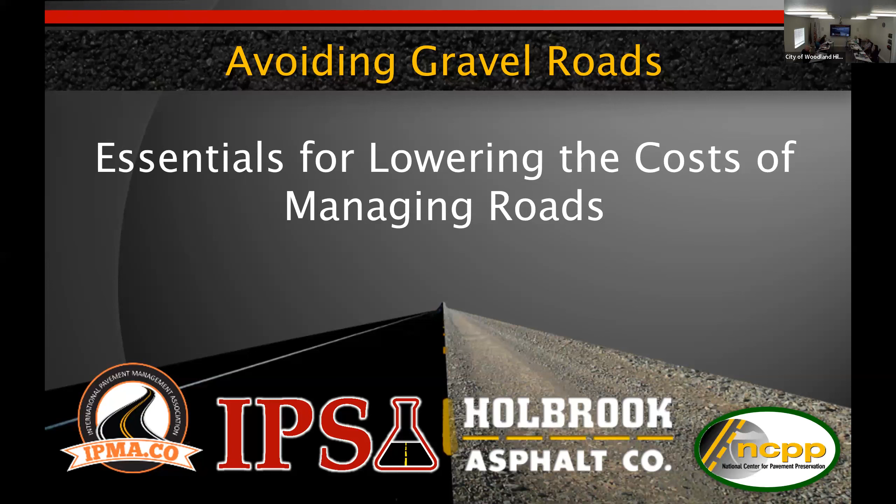Holbrook Asphalt is the company I work for. IPS is a sister company that provides material. Holbrook's kind of a contractor/consultant.

Mark Beatty, who sits on the board, is the reason why a lot of the information is from those few agencies - he's been on the board of the National Center for Pavement Preservation, as well as director of IPMA Academy on their board. So he was dialed in.

When he was on the board on the Rocky Mountain West of the National Center for Pavement Preservation, the director, Larry Galehouse, committed each region to put something together on pavement preservation. He said, look, we have this great, big, huge database, we've got all this great information, but it's going nowhere. We need to start dialogue, we need to start something. Now, we're not going to solve everybody's problem, but at least we can have a conversation that starts the dialogue to help people understand how to manage their roads better.

So Mark was on the board of the Rocky Mountain West when we put this together, and this is our version of it to kind of help introduce us to you guys and give you some good, valuable information.

We always start off with something that has nothing to do with roads, other than cars drive on them. So, do any of you fancy yourselves car gurus?

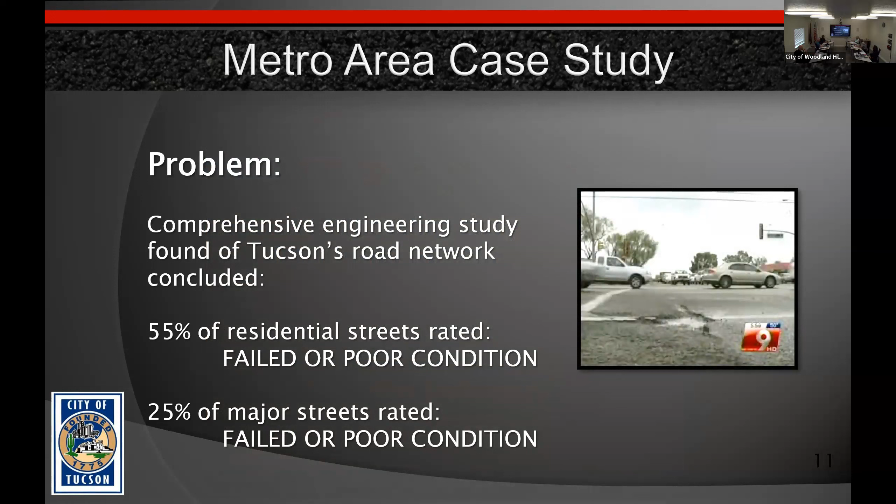So what they ended up doing was get some reports. They had an engineering firm come in and explain that 55% of their residential roads were in failed or poor condition, and 25% of their major streets. And what did that mean in dollars? It meant they had an $875 million problem: 550 million to repair the poor residential roads, 148 million to repair the arterials, and 175 million just to keep the good roads in good condition.

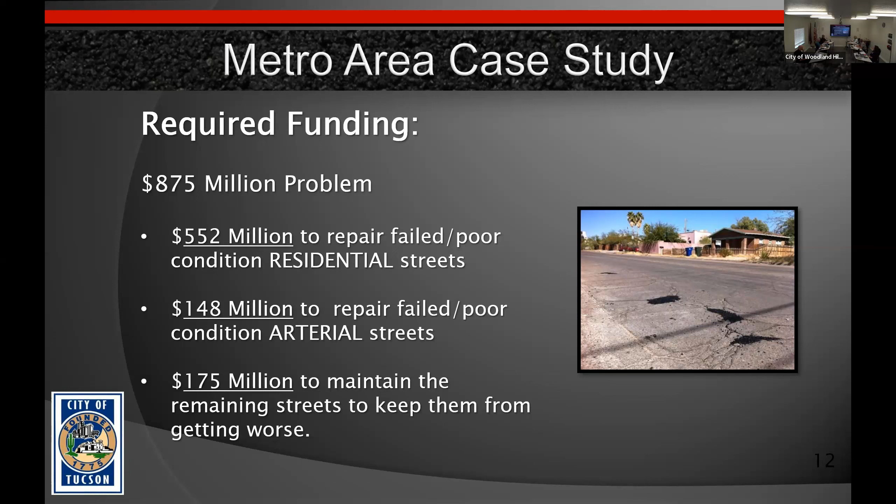So, you're making us feel a lot better. Well, everything's relative — I'm pretty sure your budget is similar, just the numbers are changed. It's relative because your budget is what it is, their budget is what it is, but they didn't have this in their budget. So what did they do?

They went and got a $100 million bond. The city council decided they'd throw in $20 million, but that still left them needing $755 million to get their roads back up. Now they're on their second $100 million bond, and they're making progress, I would say, but they're not doing things right.

Things got political, so they want to show they're doing a bunch of stuff, and it's a paintbrush approach. When you take a bond out, you guys well know this — if it's not a valuable tool and it's not serving you for the long term, say two years down the road your roads are back in the same position. They look good for 2 years, but they didn't really benefit you long term by making them last longer or provide better ride quality. So you've spent that money and it's gone. Now you've got to pay the bond back plus interest, and your roads are in no better shape.

I'd say right now they're spending about 75% of their budget on good value, 25% I think could be better. But it's because it's very political, and people making the decisions don't understand how roads deteriorate. So that's where they want it to look good — they want it to be the news.

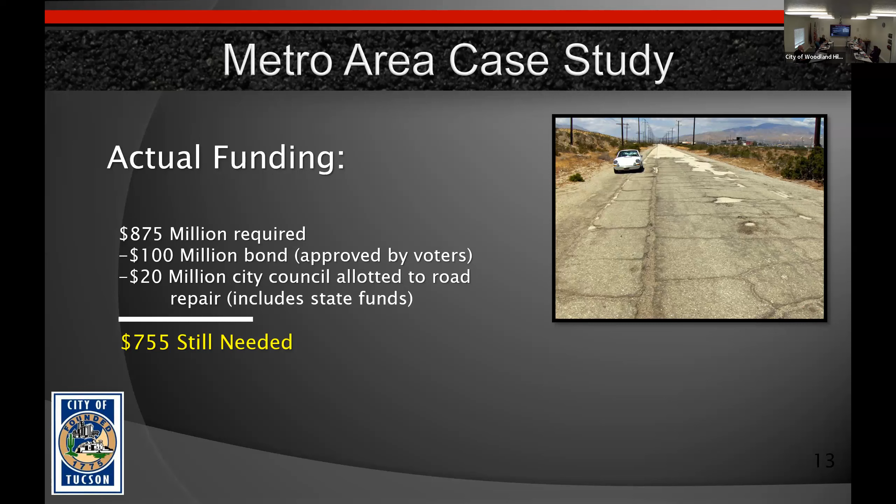They want it to be on the news. They don't. You need to really focus in and make a difference.

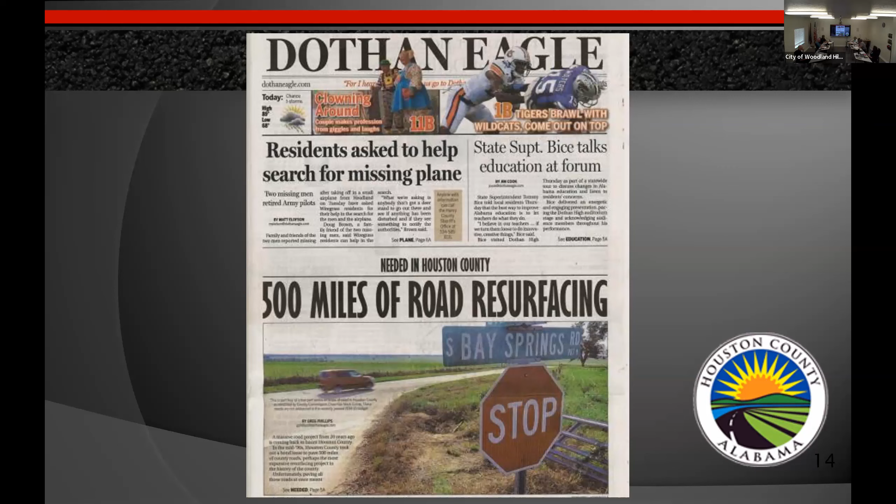Mark and Dr. Heitzman from the NCAT track out of Alabama were out doing some APWA classes, similar to this. A public works director for Houston County, Alabama came in. He said, okay guys, I need you to tell me what to do. I've got 500 miles worth of roads. It's a massive road project from 20 years ago coming back to haunt Houston County.

In the 90s, we did 500 miles of road. Unfortunately, doing all those roads at the same time meant they would all deteriorate at the same time, and that moment is upon us. Houston County doesn't have $30 million at its disposal, but the problem isn't going away.

So what do you think Mark and Dr. Heitzman told their public works director? He said, you guys have the answers, tell us what to do with our roads. Unfortunately, you can't put the genie back in the bottle. Once the roads deteriorate, it's very expensive and costly to repair them.

But what we did teach him is we sat him down and said, look, we can teach you some strategies and philosophies so you don't find yourself in this situation again. I think Houston County is still in the process of taking care of those 500 miles of roads, but they've made a huge dent in it because of a mindset shift from a worst-first to a best-first process.

That helps a ton. You said best-first. A best-first approach is the best way to spend your money. I'll explain that to you in a little bit here, along with some of the data behind that.

So the basics of pavement preservation: your asphalt, when it goes down, is nice and pretty and black. Asphalt is really basic, there's not a lot to it. It's two components - you've got the aggregate or rock, and then the asphalt binder or glue that holds the rock in place.

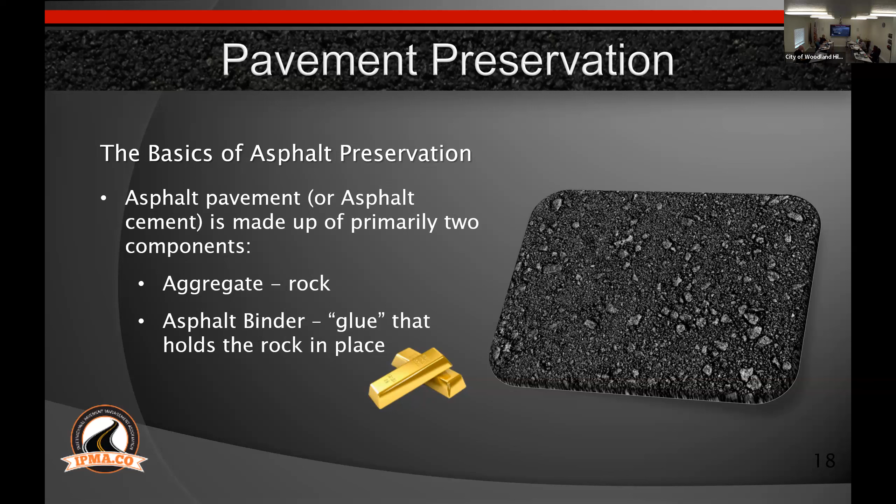Now, the rock has been here for millions of years, and it'll be here millions of years after it's gone. The important part, the reason the gold bars are there, is because that's the key part of the pavement - the binder that holds the rock in place. We need to take care of that. That's what makes the roads last longer. If you don't take care of it, it falls apart and loses its flexibility and adhesion qualities, so you'll see it gray out fairly quickly.

You'll see it gray out, have some raveling, then you get cracks in it, and eventually moisture gets down in the base and you have failures. Our goal is to preserve this so you push these stages in the pavement's life further and further down the road. You want to take a 20-year pavement and make it a 40-year pavement. That's why you lower your ownership cost.

But the key is to stop oxidation - that's the primary concern, oxidative aging to your pavement. That's the basics of what's destroying your pavement. Now, oxidation is going to happen at the time of construction, it's going to start, but there are a couple of accelerators to oxidative aging.

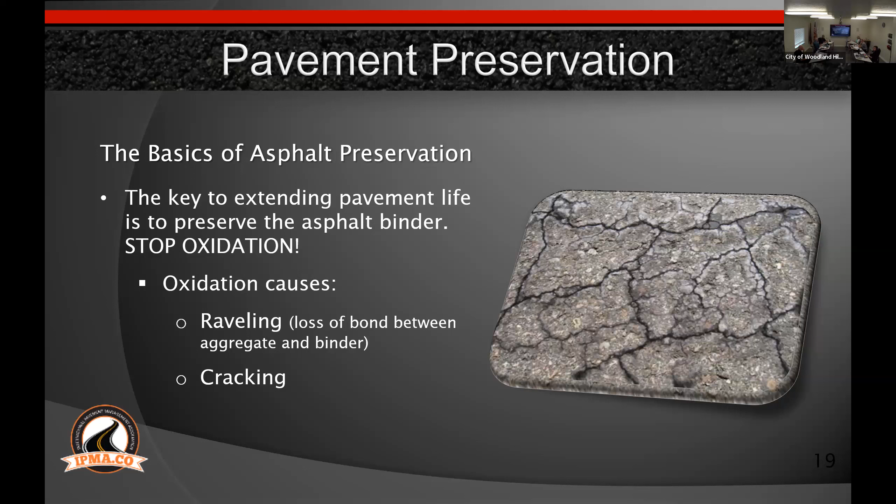You have to take a guess at what those are - I'm looking for two things. Heat, sun, weather in general, moisture. Yeah, so the two things we're looking for as the primary accelerators of oxidative aging are UV rays and moisture. You guys get the double whammy here - you've got high elevation, so intense UV rays and heat in the summer, and then in the wintertime you get moisture that sits on the road and gets pushed down into that pavement.

Now, those aren't causing the oxidation, but they're accelerating the process of the oxidative aging of your pavement.

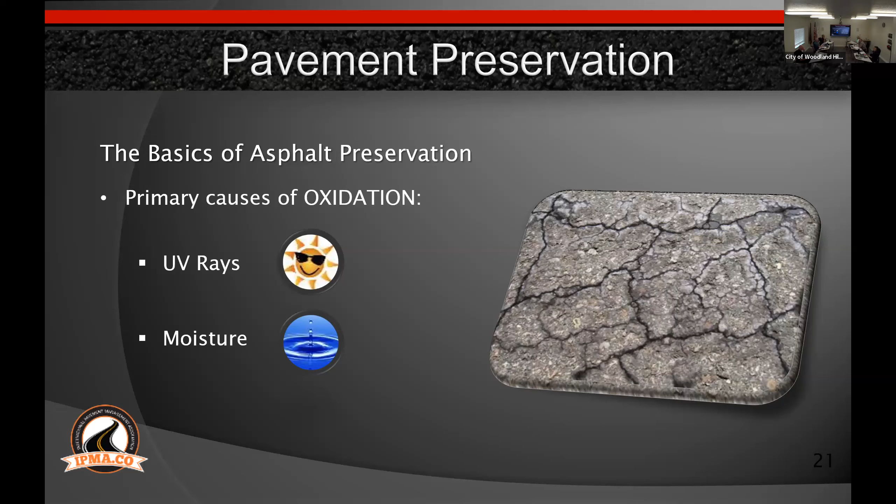So if we can slow the effect of those two things on your pavement, on a residential roadway, on a road that doesn't need a wearing course - and I don't think you really have any roads in your city that would need a wearing course. Now, you do have some steepness issues and other issues that would require you to maintain some friction. But if we can limit the effect of those two things, you can really stretch out the life of your pavement. So here's some material put together by AASHTO, called Rough Roads Ahead.

Basically, this was a report put together on a national level that said, look, if we don't change our process and what we do, we've got some rough roads ahead. It's available in PDF format on their website, but we pulled one page out of it. If you like pavement preservation, it's a really good read. If not, it'll probably put you to sleep.

But what it's really good for is for the people that hold the purse strings and are deciding where the funding goes. This is an excellent report because it helps you understand where your money is best spent. And we pulled this one page out because we liked it.

We live by this rule. It's called the life cycle of the road. You start with the design phase, then a construction phase, initial deterioration, visible deterioration, and then you get down to disintegration and failure.

And we always ask this question: when do you think most municipalities get involved in preservation? What stage - four, in visible deterioration? It's five, because our residents come to us at four, and by the time we can pay for it, maybe it's five. We were doing this class for the city of Orlando, Florida, and I guess the best answer I ever had from their public works director was 4.9 - right before it falls apart, they want the magic bullet to come in and make it brand new again. And unfortunately, when you get to that point, it's hard.

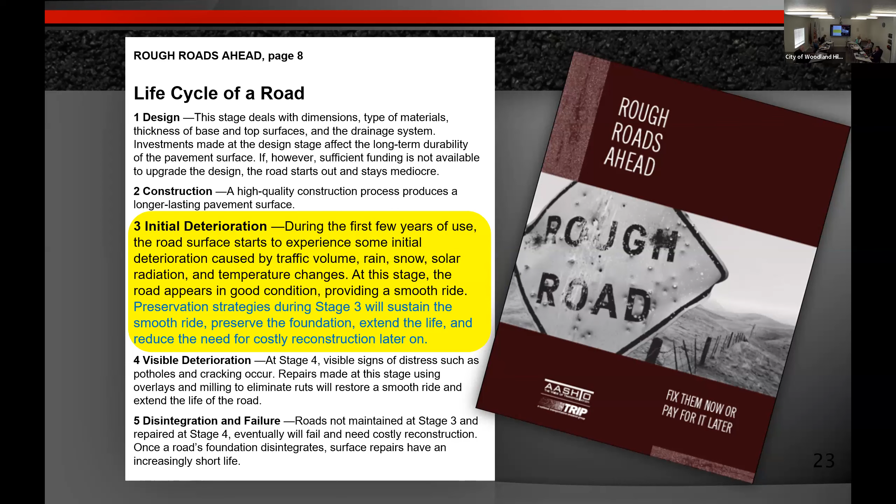So as long as we're keeping the snow off the road, we're actually helping the road. Because when the snow sits on the road, it doesn't just sit there - it builds up and gets pushed down into the whole cross section of the pavement, which accelerates the oxidative aging down through the pavement. So you want to avoid that as best you can.

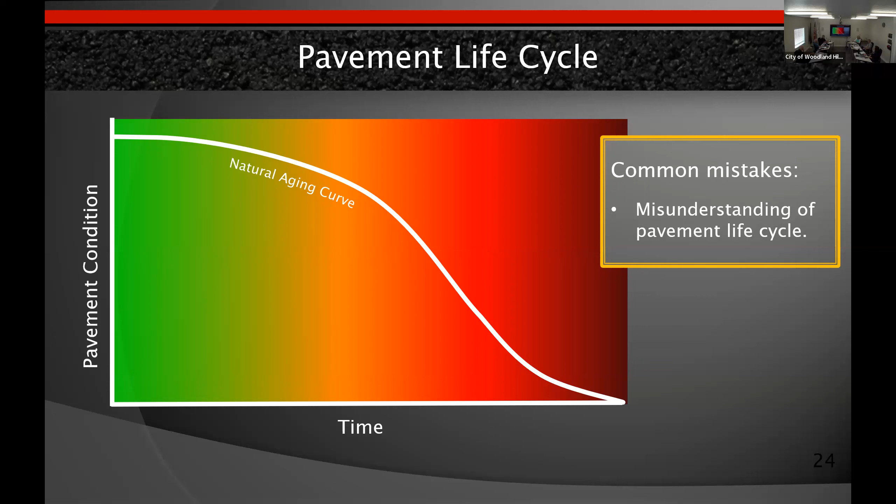The National Center says it's serviceable rideability is done at about 22 years if you don't do anything to it. But what a lot of people don't see is there was a guy named Dr. Kandahl, and he was like, okay, I see this at the surface. I see the aging. I see how things are falling apart when they're falling apart, but he wanted to know why. What's the primary cause? What can I use to most accurately describe how the pavement's aging, or the health of the pavement?

And can I stand up? Can I walk up there? Because my pointer's not working. Do you mind carrying your microphone? I'm sorry, I don't know if we have anybody online that works.

So when we look at this, the pavement starts to age, it looks nice, and then it gets to this point, and then it drops off really quick. This is actually called the waterfall. It starts to get deteriorated at a rate where it's really hard to catch and do anything.

What Dr. Kandahl discovered is he looked at this. So this is a surface, it's like a visual, the white line. The black line is kind of like an MRI view, it's what's going on under the surface. And what it measures is the flexibility of the pavement.

And what you'll see here is there's a substantial drop right out of the gate, and the damage is done. It doesn't manifest itself until here at the surface, but the damage is done here. So what we really need to concentrate on is taking and flattening this black line out, because that in turn will flatten and extend the life of your road itself, the white line.

So I'll refer back to this later on in the presentation, but that's really the key to extending your road's life expectancy and quality of use, is to affect that Kandahl curve and stretch it out for as long as you can.

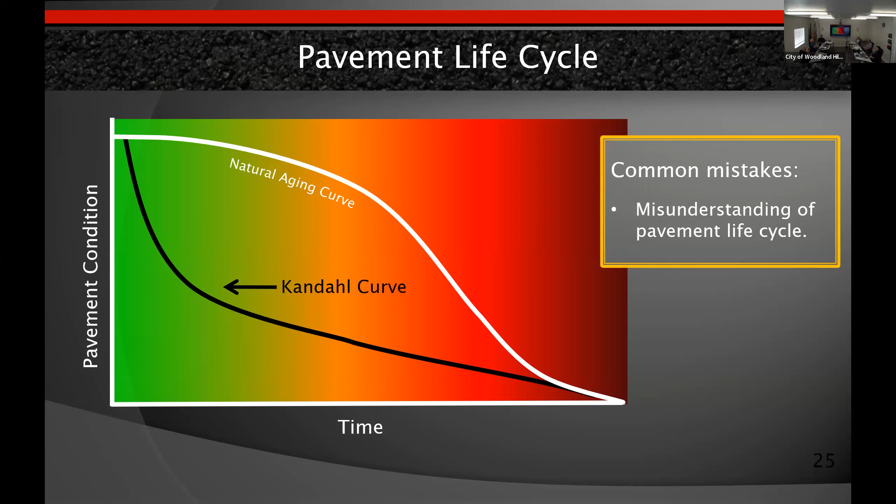Well, that's good. That means we don't have to do anything. Yeah, we're good. Somebody kick a can.

I mean, sometimes you have to do something for safety reasons. You can never neglect your maintenance altogether, but sometimes it's just, you got to bite the bullet and decide, wait, we don't want to spend any more money on this road until we're ready to reconstruct it.

A really good example of all of this is Thousand Oaks. In reality, we have done nothing to Thousand Oaks since it was laid down in 2002. The asphalt is 20 years old. The only thing that was done was a chip seal that failed. Now you look around in Thousand Oaks and you see where it looks really odd. The surface isn't uniform from side to side, and you can see where the chip seal peeled off because it didn't stick.

Now there was an issue with it, I don't remember what happened, but you look at the rest of the roads in Thousand Oaks and see how they're alligatoring. The cracks go all the way across the road in a lot of spots, even in places where we haven't had truck traffic.

Now you go from the basin up to out the back of Deep Forest. You had 500 truckloads of dirt go over that section. But all the other roads in Thousand Oaks didn't see that damage, and they're just as bad. So you can't blame the damage on that short section on the 500 truckloads. The damage we're talking about here is from neglect.

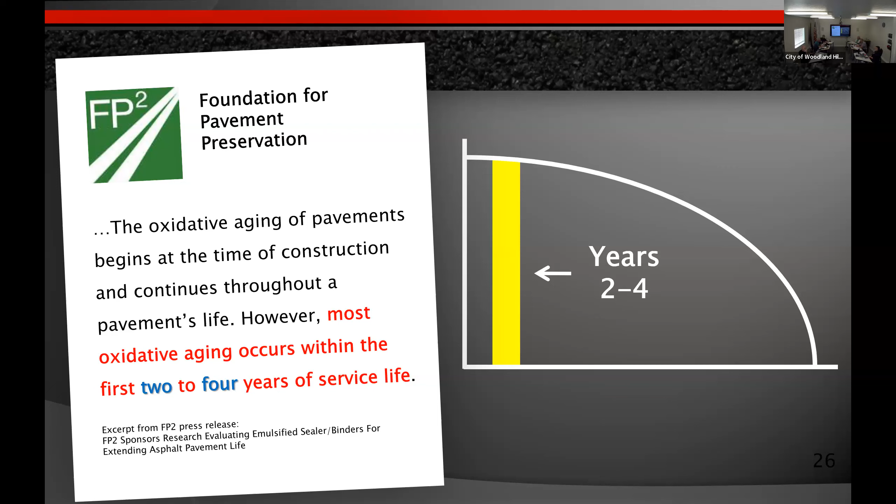Now, the road that's still in good shape - if it falls out of maintenance into rehab, your dollars go up exponentially. And if it falls out of rehab into reconstruction, like your 30-year-old road, the dollars go up exponentially again. So the return on your investment is a lot better in the maintenance mode on your roads than it is in rehabilitation or reconstruction.

So what we ended up doing with Spanish Fork is we got on their local channel and tried to help the residents understand what we were doing. And Jamie says, okay, I'm in - this was back in 2009 - but if this doesn't work, you guys have got to give me a job. So he flipped his approach.

From the way I understand it, the majority of his dollars were spent on the back end, with a little bit to spend on the front end with some crack sealing and potholes over the winter. But when we went in there, we flipped that - we put the majority of his money on the front end, taking care of his good roads for about 5 to 6 years. He still kept some money in the budget for the back end, because you can't neglect it for safety reasons, you've got to have some of that there. So that allowed him, after 5 to 6 years, to get all of his roads into good shape.

They're taken care of and they're being preserved. Now we can shift some of that money back to the back end and start rebuilding some of those roads. But when you rebuild those roads, they immediately go to the front of the line for preservation because that's the most valuable tool you can do, on a brand new road. So what he was able to do was his overall road network was in decline because they were worst-first, and he had the big housing boom through the 2000s.

So what we did over these 5 years is we kind of flattened it out. And then he started rebuilding some of the really bad roads and putting them into the maintenance program. And now his overall network is starting to increase. He's done an excellent job of that.

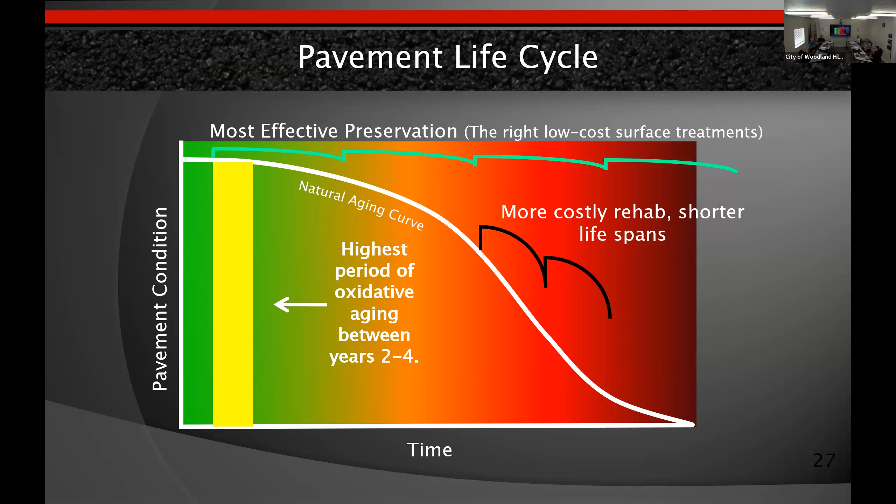I actually got him on camera a couple months ago, I'll send you guys the video of Jamie. I speak of Jamie because he's right here, your next door neighbor, and they've done an excellent job in Spanish Fork of preserving their roads. They had to make a change in thought process to start managing their roads more like the National Center recommended, like the IPMA Academy recommended. And the data just shows that's the best way to manage your roads.

Here's some information. When you get involved early, you're up at the top. It doesn't show on the screen, but when you're in the green, you get involved early when the pavement's still healthy, and the preservation is a lot cheaper to do. When you get down to intermediate or late rehabilitation, the dollars you spend on those treatments is substantially more, and they're short-lived because you have an underlying problem you're not getting rid of. You're just covering it up.

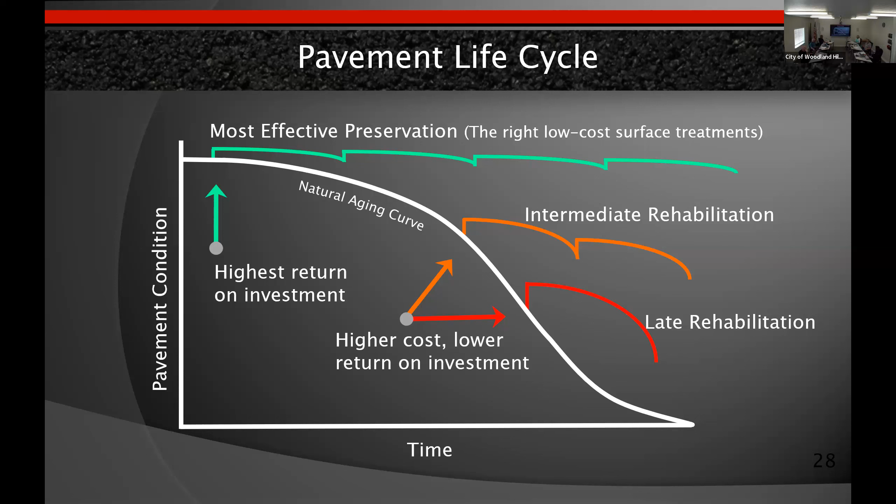So again, the higher return on investment, from AASHTO: every dollar spent keeping a good road good precludes spending 6 to 14 dollars to rebuild one that has deteriorated. I'd much rather spend $1 on a road than $6 or $14 on a road. Out of everything we say, those are key points to remember.

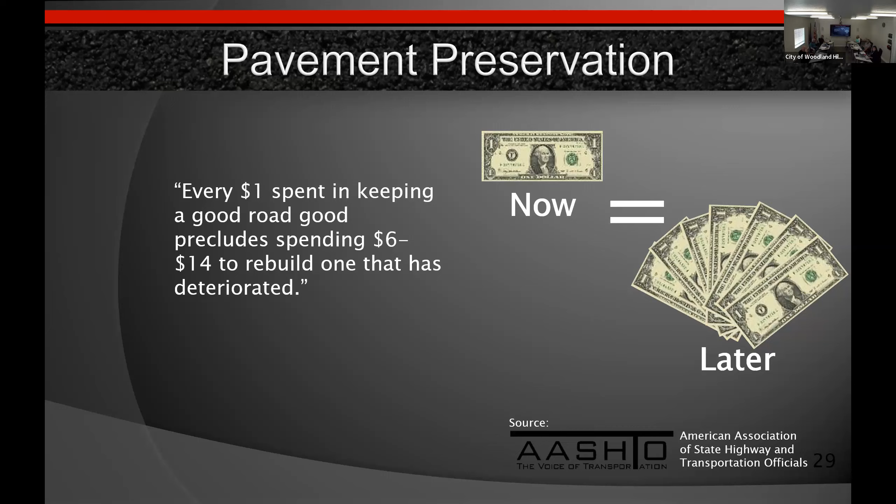This was a subdivision. So I showed you Tucson, they're kind of the poster child of what not to do in the past. They're getting better. So if you help us, we won't become your poster child. I don't want to be completely disparaging towards them because they have done some good things. We can leave Tucson out of it, that's fine.

But this was put together for a town just north of Tucson that has younger infrastructure. City council came to us and said, well, what do we need as ownership? So they had a subdivision, 250,000 square feet, and it was 20 years old and the pavement was gone. It was deteriorated and the city had to repave it. And they said, okay, so what can we expect over the next 30 years after we repave this? What is it going to cost us to own this pavement? And we kind of said, well, it depends.

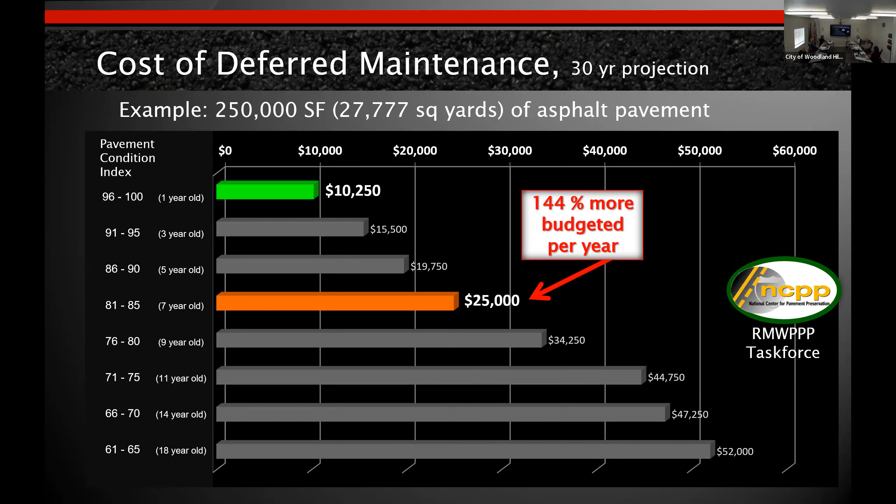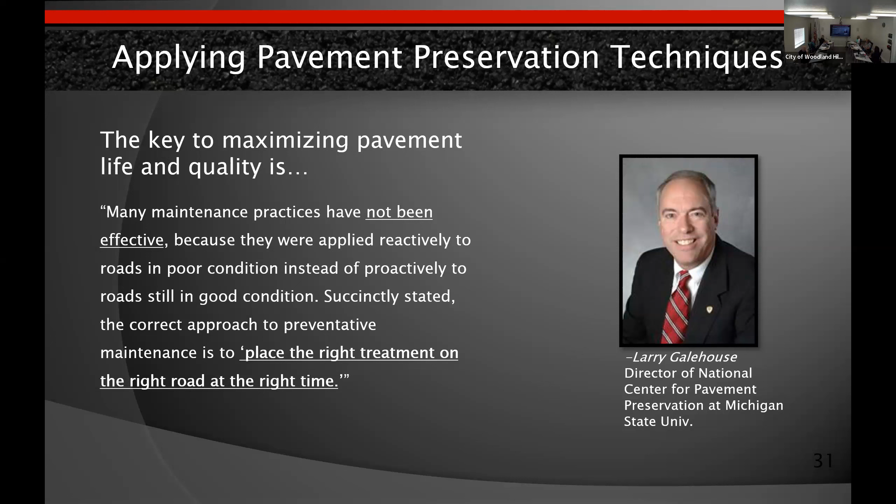Again, Larry Galehouse, Many Maintenance Practices, he was the director, he's since retired. I run into him at conferences around the country. He's still a real thought leader in the industry, but we live by this: many maintenance practices have not been effective because they were applied reactively to roads in poor condition instead of proactively to roads in good condition. Succinctly stated, the correct approach is the right treatment on the right road at the right time, because there is not one treatment that fits everything.

So these are some of the tools that are available to you guys. There's a fog seal, which is basically an oil and water mixture.

There's seal coats where they take a fog seal and they add some type of filler material to it, like sand or copper slag or tire rubber or something. Then there's slurry, which is an aggregate, rock, and oil mixture. And then there's microsurface, which is very similar to slurry. Then you have a high density mineral bond - I'll talk about that a little bit. It's a thinner treatment, but it's very effective when it's the right thing to do. And then you have some chip seals where you put oil down and then aggregate on top of it.

So I'll just kind of go through each one of these and talk about the pros and cons of each. What ones do we do right now, Corbett? We always talk about chip seal, but do we do some of these others?

I was told we couldn't do chip seal because the roads are too steep - the majority of the roads are too steep, so the machine runs over the truck. I've done some pretty steep roads in Cedar Hills, where the truck runs away with the machine. Yeah, you do have a problem when you get really steep.

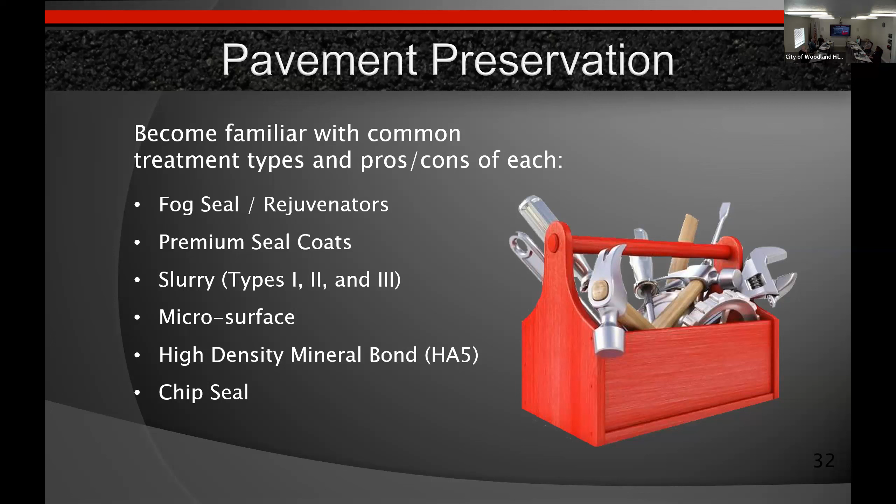Okay, so we start off with fog seal. Obviously it's the cheapest thing you can do. The pavement extension is also less - you get less value out of that. Public acceptance is high. Why do you think that is? Because they see it, looks pretty, it's nice and black, and they can see the work being done quickly.

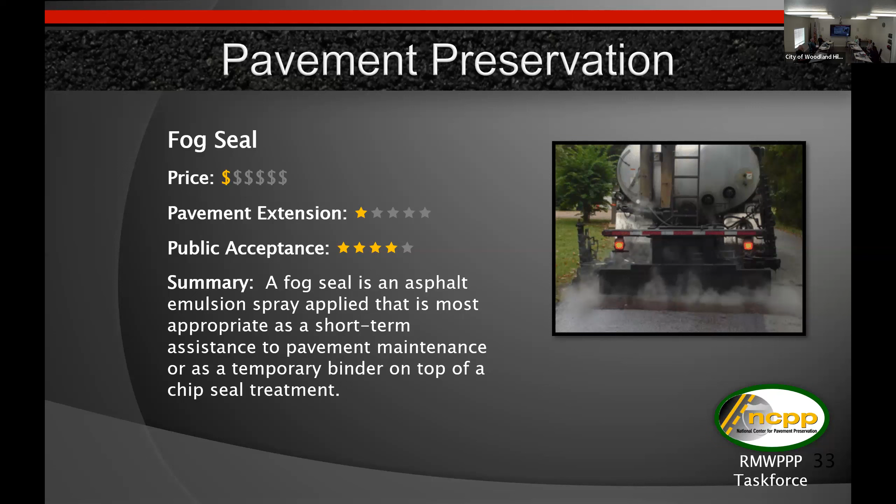But unfortunately you'd have to do this about every 12 to 18 months to be somewhat effective at all, because the life cycle of it is 12 to 18 months. It doesn't have a lot of value as a standalone - I'd say that's its problem, its short life cycle. But where it works really well is in conjunction with chip seal. It helps with rock retention, and it helps a lot with public acceptance. Those are your benefits there.

Is that what somebody does to their driveway? No, they typically would do a seal coat or something similar that looks like that. A fog seal, you see a lot on DOT projects - they'll spray it on the shoulders and the rumble strips. I've done some stuff on some rumble strips and shoulders.

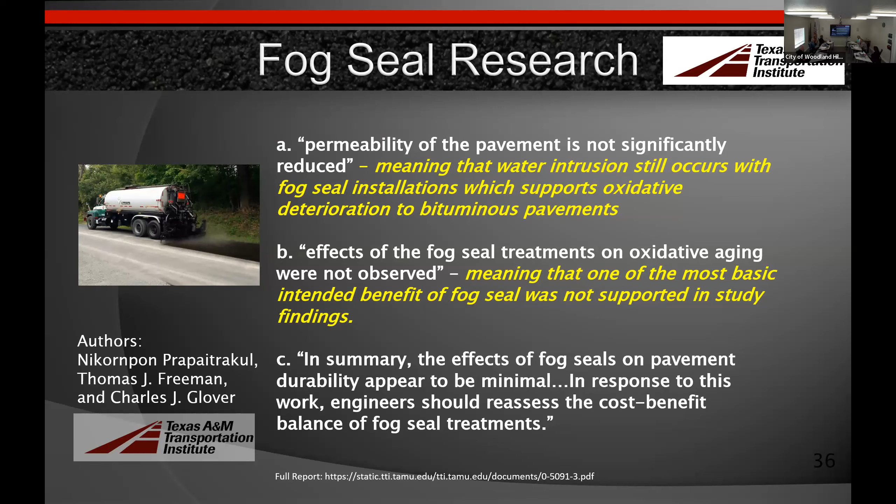Their findings were that the permeability of the pavement was not significantly reduced. Effects of fog seal treatments on oxidative aging were not observed. In summary, engineers should reassess their cost-benefit analysis when using fog seals as a preservation tool. They have some benefit though, but in conjunction with, like I said, chip seal - helping hold rock, helping public acceptance.

Then you step up into something like a seal coat, where they take a fog seal and add some fillers to it - usually a mineral sealer, a mastic sealer, polymer modified sealer, named after the filler that's in it. The price point ticks up a little bit, the pavement extension goes up a little bit - you're looking at a 1 to 3 year life cycle on this. The pavement extension is a little more than a fog seal, and public acceptance again is very high.

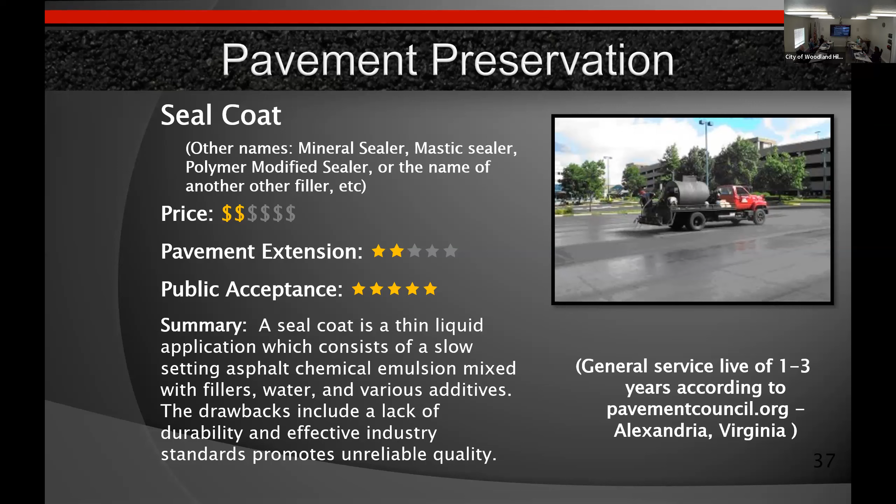I typically will recommend these for people that have a business they're looking to flip, and they don't want to spend too much money on their pavement, but if they need it to look good for a little while, this is probably one of the tools I'd say - do this on your parking lot, get it sold, and let somebody else deal with actually preserving your pavement. That's kind of what you're getting after 2.5 years. It's obviously better than a fog seal, but still pretty limited on its capabilities.

Then there's slurry. Type 1, 2, and 3 denote the size. Type 1 is 1/8 inch aggregate, type 2 is 1/4 inch, and type 3 is 3/8 inch. What they do is take an aggregate sand mixture, put oil and water in a pug mill, mix it up, and then put it down in a grade box and drag it. So the aggregate kind of determines the thickness of the material.

It's really good where you have a road that has a low crack ratio and it's had some aging to it, where you've got some pits and the fines have gone out from around your rocks and your coarse aggregate is sticking up, so you want to add some aggregate back in. That's where this works really good. But you want a low crack ratio because the cracks will project back through fairly quickly, in about 18 months. So that's where it works really well.

Can you describe aggregate? The aggregate is just the rocks, there's small rock, there's a gradation. So there's sand, and then there's a little bit bigger rock, then a little bit bigger rock. In a type 1, 1/8 inch is the largest rock in that gradation. In type 2, 1/4 inch is the largest rock.

So it'll help add some aggregate back into your pavement, and give you a nice gauze temporary Band-Aid over top of it. That's where it's really good. Where it doesn't work so good is when you're trying to be proactive and you have a nice, tight, smooth, new pavement - it has a hard time biting onto that. So when your plows come along, it delaminates and sheds off, and you lose a lot of the material.

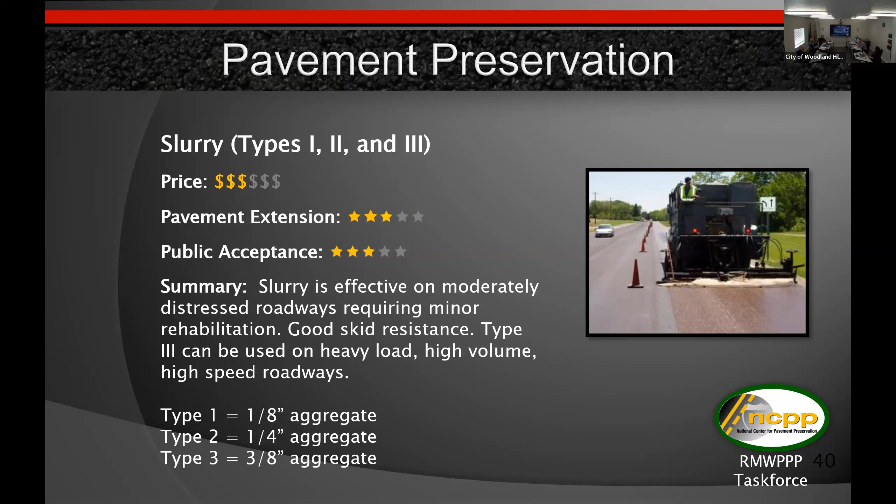Now, granted, with the slurry, it's a rough surface and you have rocks and oil. When the oil cures, as the cars drive on them, it fractures the rocks and it sheds off. It's just the nature of it, it sheds a little bit off. But when you're trying to be proactive and you have a nice, smooth, tight mat on your pavement, it has a hard time sometimes biting that and holding on to that smooth mat.

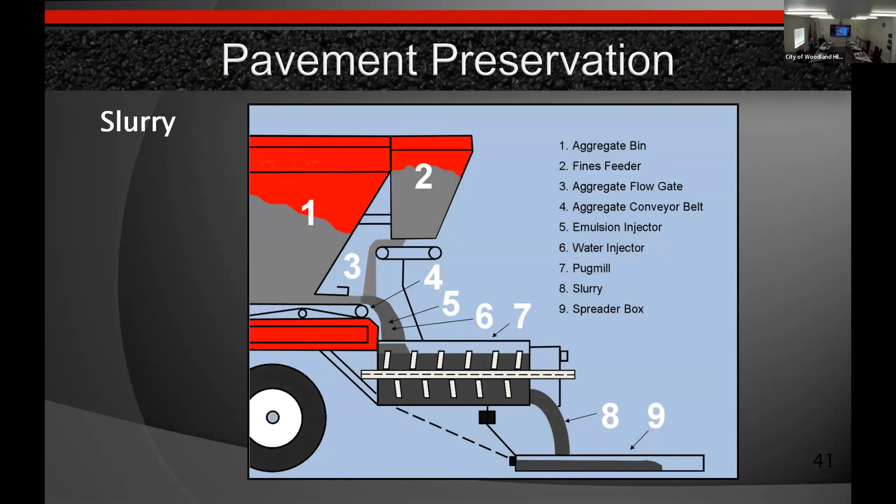Is it cured by time or temperature? It's UV. All of these except one are UV cures. So you want nice, sunny, hot days, that's what you want.

That's just some of the material, that's what it looks like. One of those is brand new, one of them is 6 months old. So you can kind of see you have those rocks that fracture off and shed off for a little while. That's usually gone after a year or two, but it's just the nature of it.

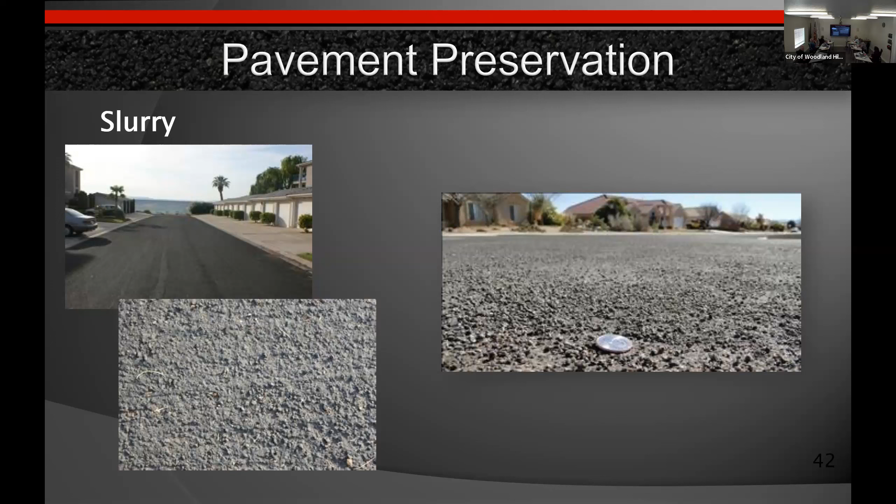It is a really good tool, probably the most widespread tool. It's fairly cheap, but as effective as it is, it's not necessarily effective all the time.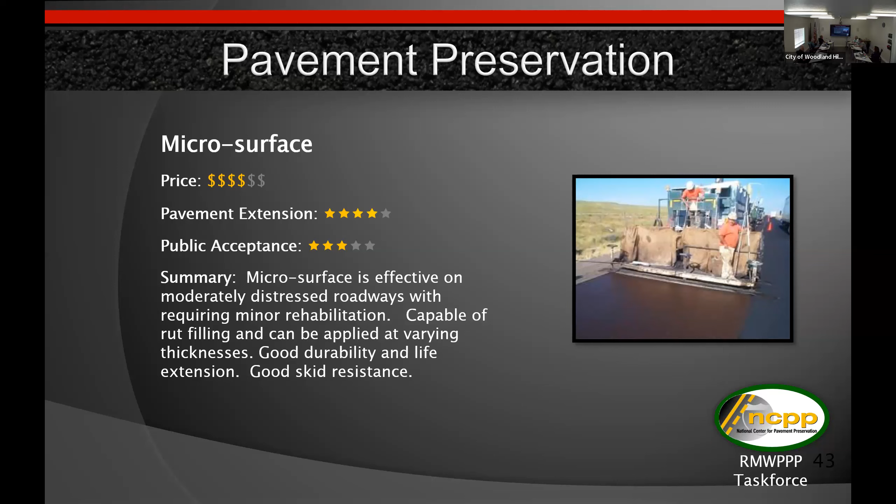The microsurface is probably the treatment of choice by UDOT. But this works better than slurry in a couple ways. Everything in here is a UV break except this product - this product is a chemical break. The reason is, back in the 80s on the Autobahn, they were having rutting issues, and they were using slurry as their treatment type.

And when your roads are rutting, you want to flatten them out. So they were trying to do that with slurry, but with slurry, as cars drive on it, it just contours back to the road's contour, so you don't get rid of the ruts. So what they did is some engineering - they put in some cement, some polymers, and used a different type of aggregate in a slurry to make microsurface.

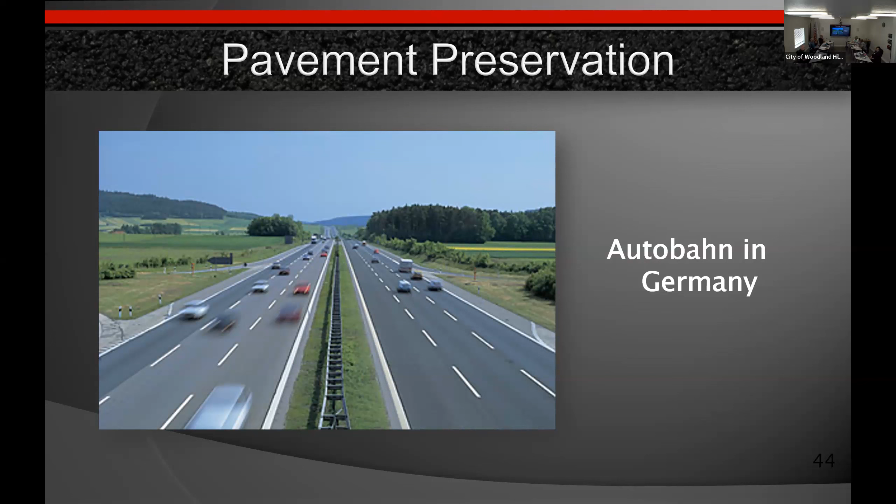What it does is allow you to rut fill up to 1.5 inches. But the U.S. Department of Justice has decided that that's more of an overlay, so if you do that, you have to do all your ADA upgrades with your project. So the two benefits of microsurfacing are: it's stackable up to 1.5 inches for some ruts, and it's also a chemical break, so you can get back on it really quick.

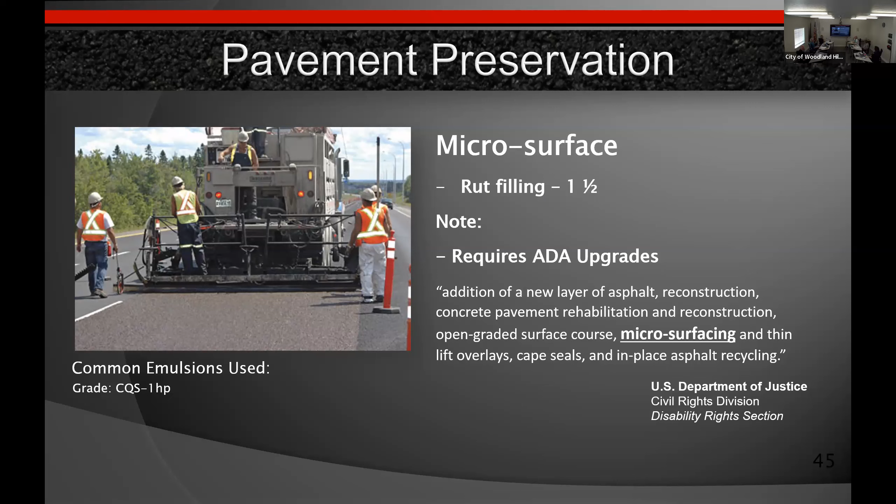I've seen cars back driving on this within 45 minutes. And like a slurry, you're talking 4 or 5 hours. So those are the benefits and some of that.

What are those ADA upgrades? The ramps, signage, your ADA, if you have sidewalks all have to be up. Your curb and gutter has to be up if you have curb and gutter. Your lights, your crosswalks, signage. Cool, we don't have any of that. It might be good. But I have seen municipalities go away from using microsurfacing because of that, because it doubled the price of their project to do the ADA upgrades.

Some more information coming out of Texas focuses on permeability. What that means is you're still getting voids, 8 to 12% voids on a new one, 10% after 6 months. What that means is you're still getting some air and maybe some moisture in there. You need to be careful that you don't get moisture under your pavement, because then especially here you get that freeze thaw and you could pop it off. This is for microsurfacing and slurry. Just be careful. If it's good for the road, I think here in this environment, it works well.

If it's a rougher road with a low crack ratio, you can have some instances of failures. The difference between slurry failure and a microsurfacing failure: a slurry failure, all the material will just kind of shed and slough off. It'll just kind of be roughy, sandy, and it'll slough off. Now, if you have a failure with microsurface, it can come up in sheets because it's got that polymers and the cement in it that holds it together. So it can become a safety hazard if it fails.

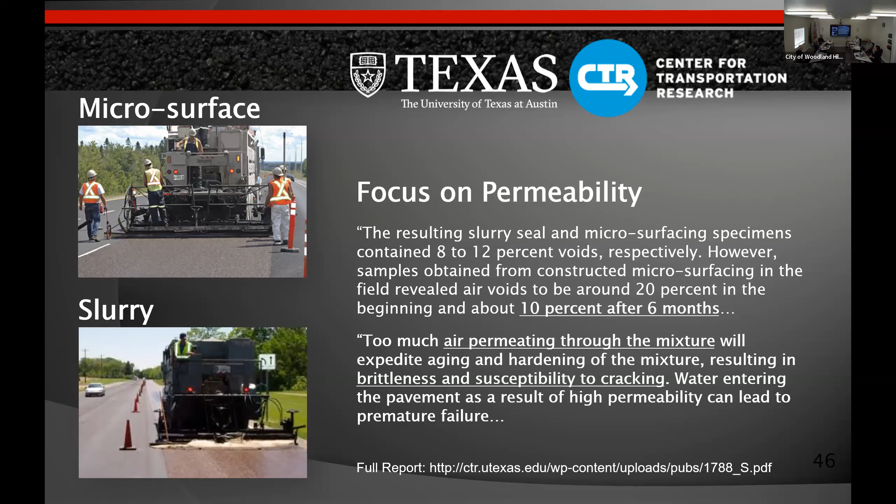One of the things that we find in our city is because we don't have as many miles of roads, it's hard to get people up here. So, if I did a project for you guys, I would piggyback you on Mapleton, Spanish Fork, Salem projects. I'm there every year doing those three at least, and a bunch more in Utah County.

So then there's the high density mineral bond. It's probably the newest but fastest growing treatment in the country right now. You see the price point ticks up. Pavement extension is fairly good, and the public again loves the nice, pretty black roads. Where this wouldn't work so well is, like I say, if you have Highway 89, I-15, it's not a wearing course. This is strictly to protect your roads from the environment, not traffic. Now, I use HA5 in conjunction with another tool where we do higher volume, higher speed roads, and it works great because you get the benefits of both tools. But as a standalone, HA5 is not for a high speed, high volume road.

It's more for lower volume, lower speed residential roadways where the environment is your concern, not necessarily the traffic. Traction is neutral to new pavement. We've done some studies that showed it increased friction a little bit in some instances, but for the most part, it's neutral. So if you pave a road and you're comfortable with the friction coefficient of that road in that use case, HA5 should be fine on that. But if there is an instance where you feel like you probably should add some friction, like if you're coming down a hill into a stop sign, I would probably steer you to another treatment. I've done that for Cedar Hills several times.

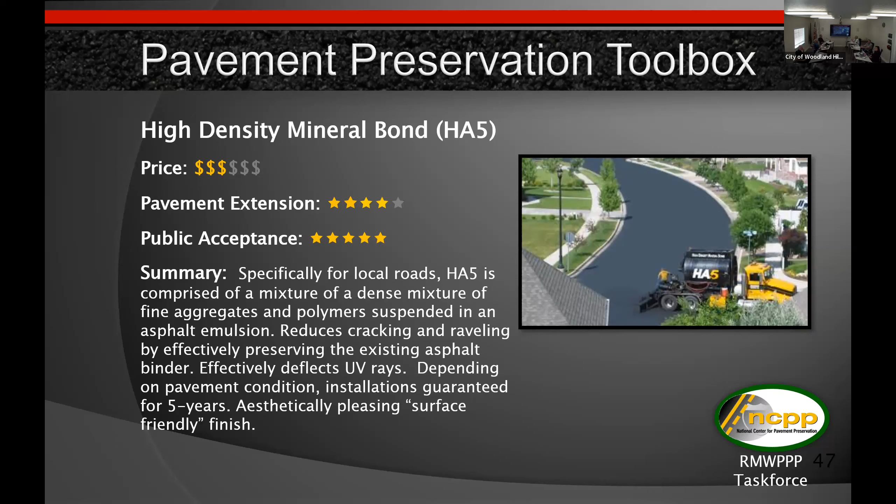Where it's a chip seal and an HA5 cap. With the two different treatments coming in from the same road, that doesn't affect much. It looks very similar, just a little bit of a texture change as you get closer to the terminating line where you're trying to increase your friction. And then you get chip seal.

Chip seal is probably the most, how do I say it, price fluctuating. You get a volume discount with chip seal. So like if you're Utah County and you're out on the west side of the lake with 15 miles of straight road you're doing chip seal on, you're going to get a great price. But if you're trying to do it on windy, slower, tight roads, you're probably not going to get as good a price.

And I don't really recommend chip seal as a standalone project in residential areas, especially if you have cul-de-sacs or tight corners, because that aggregate rolls out. Now, we do a combination of treatments where I have done it in residential areas in Cedar Hills and some other cities here in Utah County, and it works great. But you just have to make sure you're doing the right treatment.

I don't want to get into a failure like we do in roundabouts. I've had to do a couple of roundabouts with some of this, and I just hate it because roundabouts are hard. No matter what you do in a roundabout, it's hard. And I avoid chip seals in roundabouts. I'd like to do microsurfacing, but it's kind of cost prohibitive to bring it in and do it in a roundabout.

UDOT does a chip seal with a fog coat. I've done roundabouts in Cedar Hills. I've done roundabouts in Vineyard with what I call the bonded matrix, where we do a chip seal and we do HA5 on top of it. And it works exceptionally well.

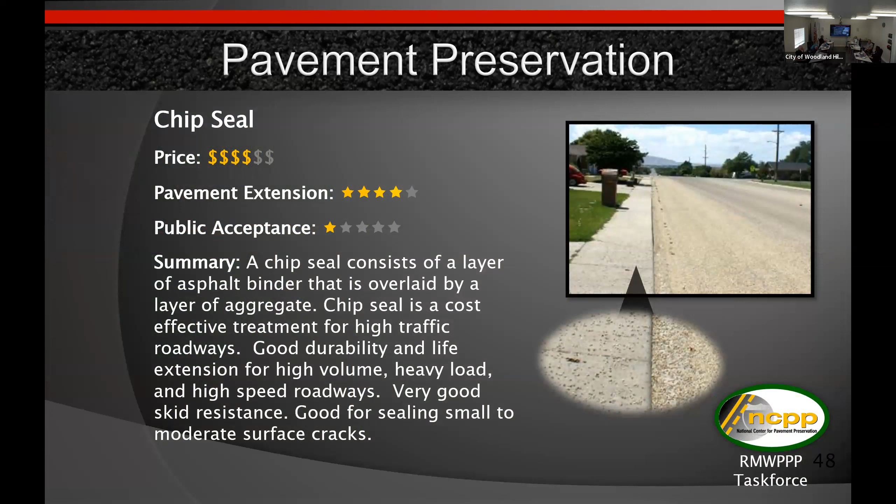Now you see the price point is kind of up. The pavement extension is high. The public acceptance is low. We had some guys in Florida tell us, yeah, that should be negative 2 stars on public acceptance. It gets a bad rap, but it's a really valuable tool. It's really valuable in certain instances. But you can mitigate it.

This road was done — I don't want to be disparaging towards city council members, but I have to tell this story. This road was done during an election cycle, and there was a city council member in this city who changed his platform and said no more chip seals. That was his big stance — no more chip seals in our city. He was elected handily.

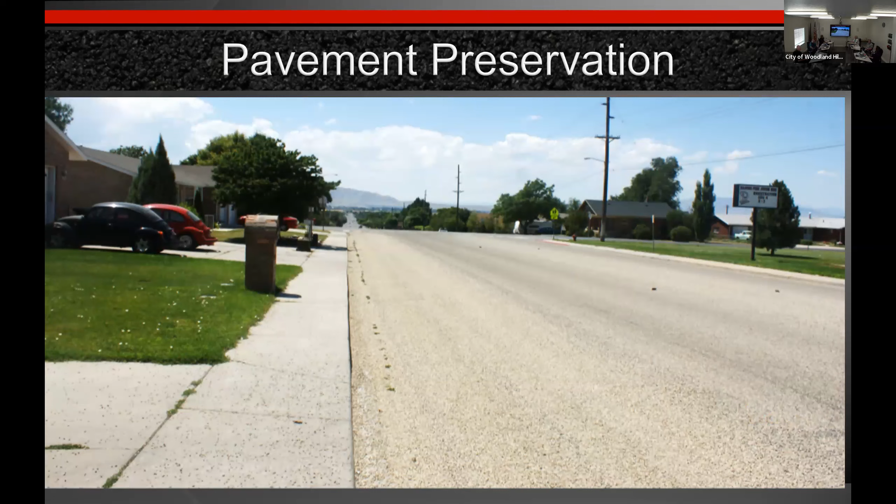They still do chip seals in this city. They just make sure they're doing them on the right roads, on the collectors, on the straight roads. But things can get political — sometimes it works for you, sometimes it doesn't. And these are more rehabilitation things that are necessary to have in your toolbox, but we want to avoid. You've got the mill and overlay, you've got full depth reclamation, cold or hot in place recycling.

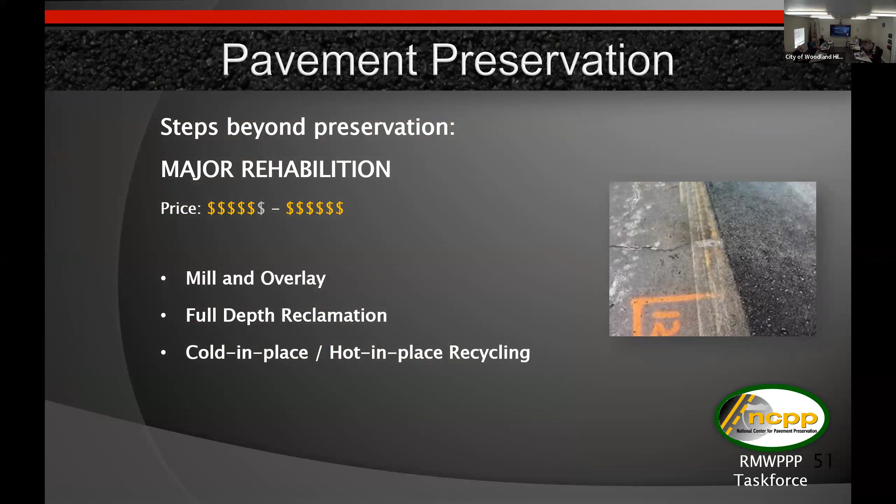I don't know that you guys, to do cold and hot recycling, would probably have to do all the roads in your town to make it worth your while. Now, the mill and overlay, that's probably something you should have. The full depth reclamation, that should be something you should have in your coffers, your ability to do. Again, we go back to the right treatment, right surface, right time.

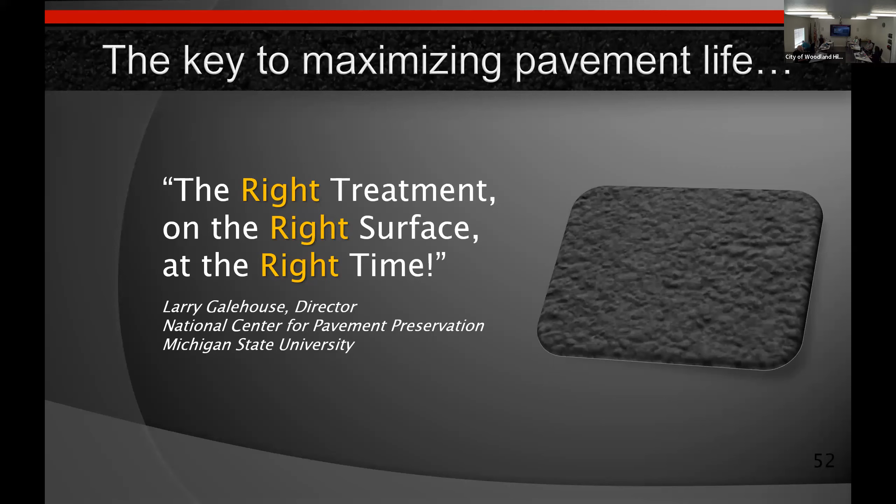So I want to take the last 15 minutes and talk about HA5 a little bit, if you're okay with that. I was trying to be pretty straightforward on pavement preservation. HA5 is what your neighbors are doing — Salem's doing it, Mapleton, Spanish Fork. That's the product that we started with in Mapleton and Spanish Fork in 2009.

Go ahead. Oh yeah, I'm just — yeah. What do you need? Can we take a 2-second pause? Yeah, for sure. I just tried to hurry to get done before 6. No, thank you for doing that. There is dinner, so.

It's just sitting in the kitchen getting cold. If you haven't, go get it. I just wondered if we could take a 2-second break and go grab it. Yeah, I'm hungry. Oh, for sure, okay. Is it in the kitchen?

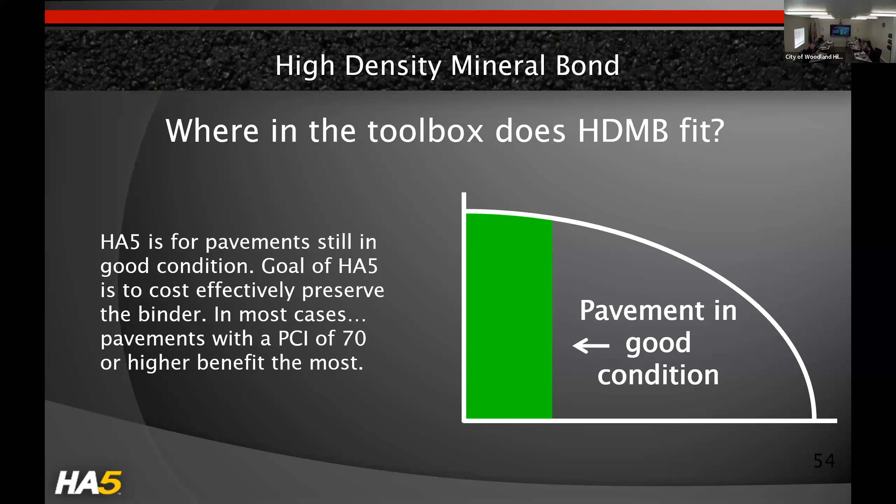Fastest growing tool in the country. Where it's good and effective is on the front end of the pavement, where the pavement's in good condition, a PCI of 70 and above. And what it's really good at is, like right here, you have the untreated pavement, you have UV light penetrating, you have moisture penetrating, which is accelerating your oxidative aging.

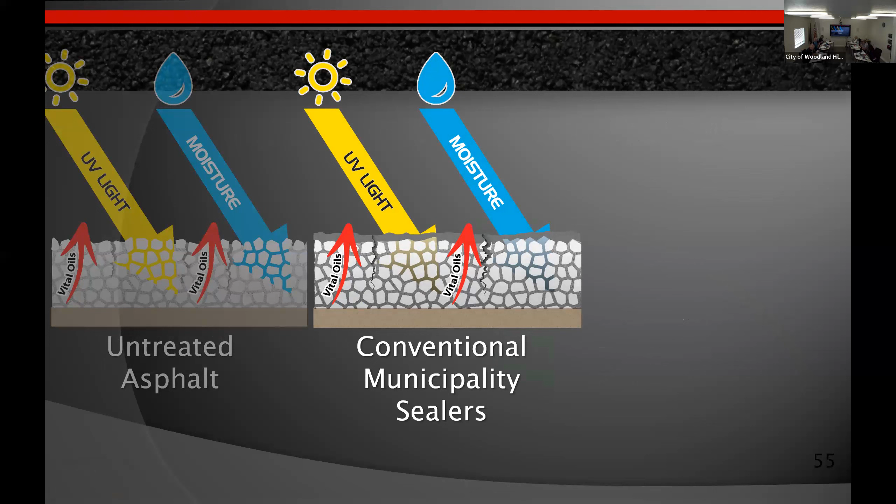With some of the conventional municipal sealers like slurry and seal coat, it doesn't help, but you still get that penetration of UV and moisture going into the pavement and oxidizing and aging that pavement. Where HA5 is exceptional is it's impermeable to UV and moisture.

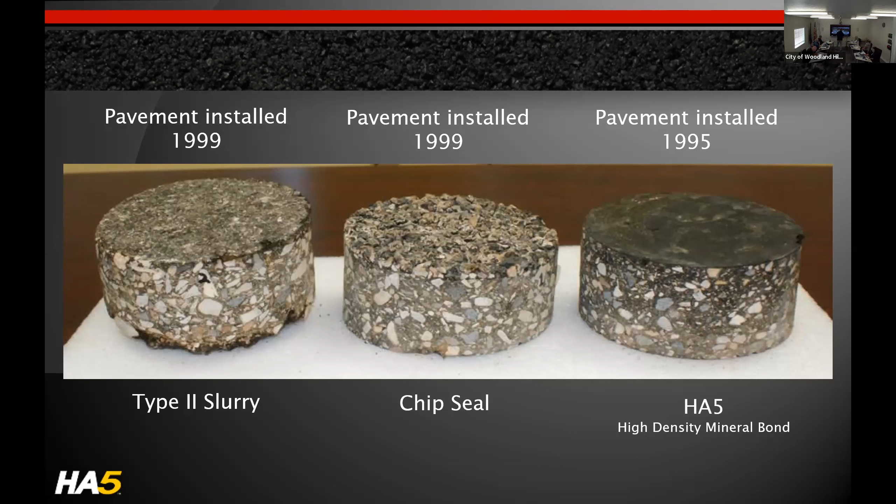That's what HA5 does. That's how it extends the life of your pavement. And that's where the Condell curve is flattened, where now you're stretching that pavement out to be, instead of a 25-year-old pavement, now you're going to get a 30, 35, 40-year-old pavement. And that's really where your savings is going to come in.

So here's some research. I wanted to show you a couple of research projects - it's not just me as a representative of Holbrook Asphalt or HA5. Now let me say something to you: HDMB, high density mineral bond, that is the category that APWA put out. That's the product category. HA5 is our product that meets that specification that the APWA put out.

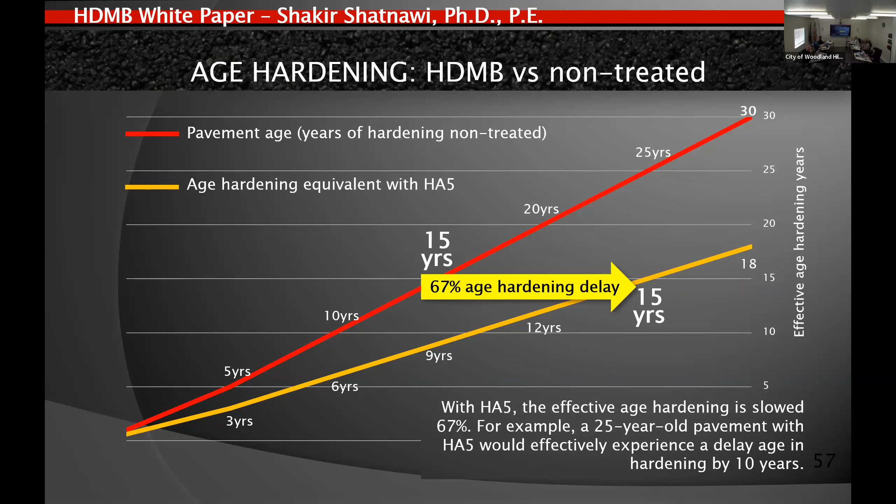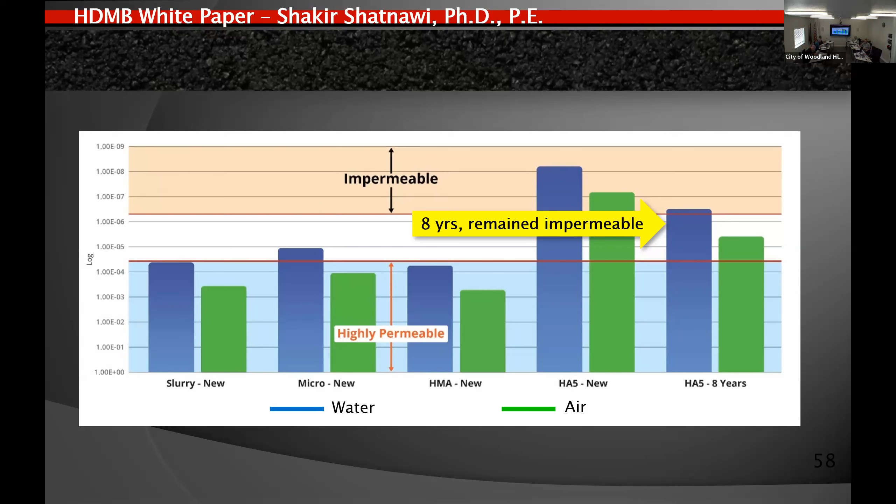That's where you're getting that benefit, and you're protecting those oils. You're not only keeping the bad things, the UV rays and the moisture, out of the pavement, but you're keeping the oils and resins in the pavement. You're not allowing them to oxidize. You're sealing it up tight. And that's where a lot of the benefit comes from.

And what is it? It's a specialized non-ionic emulsion, so it's right near neutral on the pH scale. It's engineered to carry minerals that are not compatible with an anionic or cationic emulsion.

So all the other treatments we went through today, the fog seal, seal coats, micro slurry, they're all either cationic or anionic. And when you start adding polymers or aggregate, sand, or whatever to them, it changes the pH, and you get to a certain point where you can't put anything else in it. So this starts off with a very stable base emulsion. It's called a non-ionic emulsion. And so we can add some things to it that you can't add to the other things. They won't play nice together.

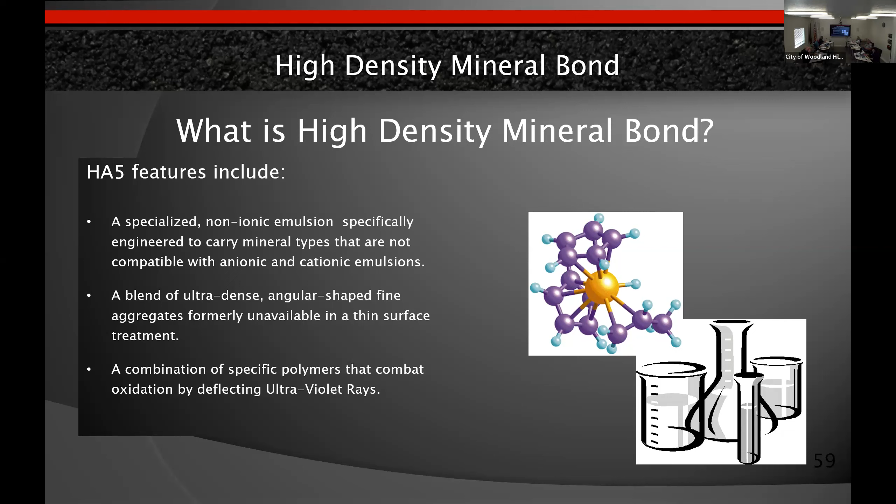So if I did a project with HA5 and still had some residual in our tanks, and then tried to load up the truck with a seal coat or slurry oil or something, they would congeal, or the aggregates would just fall out of it. It would be a mess. We'd spend a week cleaning our equipment out because the oils don't play nice together. But what that does is make it very stable. It allows us to put some angular aggregates in it. They're still fine, but they're still angular.

It really helps prevent aging. It's really what I'd call it, like a seal coat would be an SPF 15, and HA5 would be an SPF 90. That's kind of what it is.

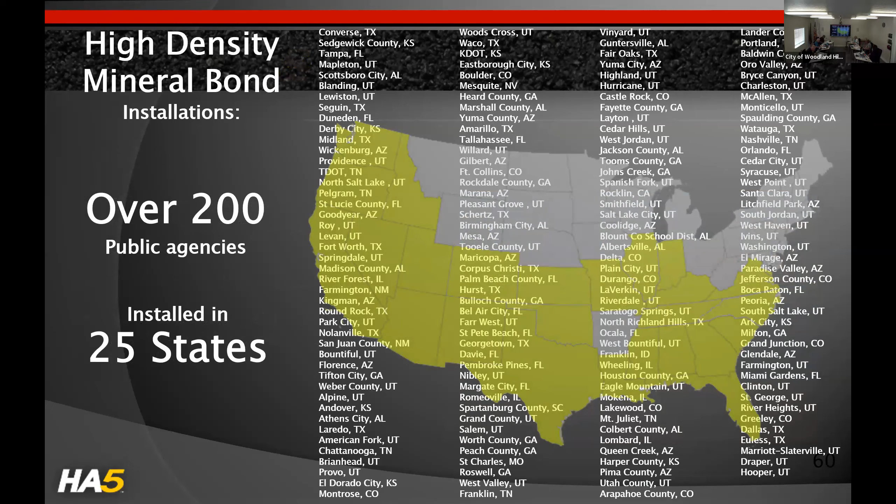So are these current clients or past clients? Current clients, a lot of these. We're up over, that's not even accurate anymore. We're at over 300 agencies in 27 states now. So this is a little bit old.

It effectively extends the pavement life by preserving the asphalt binder, reduces cracking and raveling, no loose aggregate, grainy residue. So it's fairly nice, there's a little bit of before and after. High public approval. Durability is proven since 2002, so it's more than 18 years now, 20-something years. We've had several engineers evaluate it and just rave about it.

So I wanted to get through some of this. I've got like 2 minutes left, and then I'll get out of your hair. These are just some cities that we've worked in.

We have food, we're fine. Yeah, you're good.

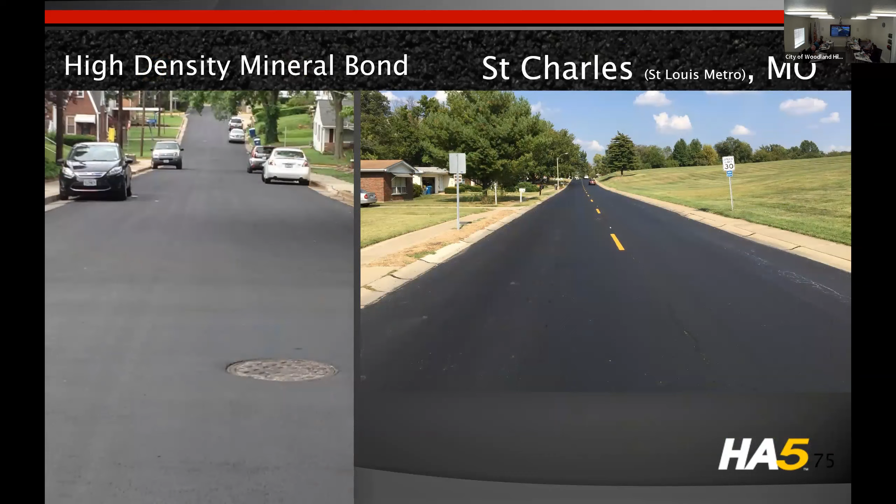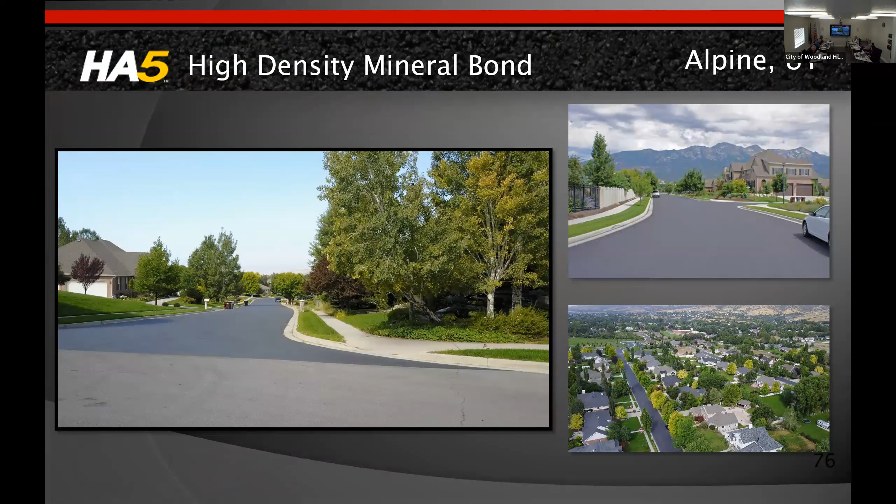So St. Charles, the city manager for St. Charles used to be the assistant city manager for El Mirage, Arizona. He mandated, well he didn't mandate, he just told us to get out there because we did a bunch of work for him in Arizona. Now we're doing a bunch of work for him in Missouri. I've got a couple others, Alpine, Shane has been, Shane Sorensen, he's been one of my longest standing clients. And if you guys ever wanted a reference on us as a company or the product, I've got a whole bunch of them in Utah County here that I would send your way.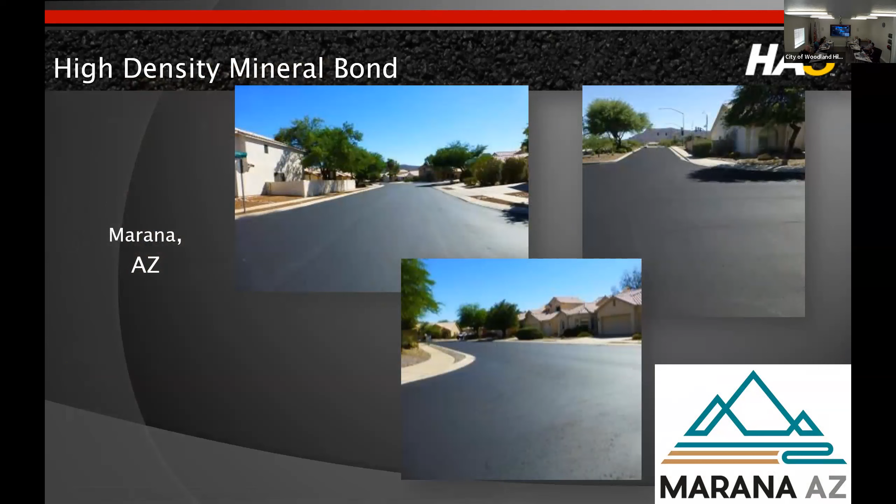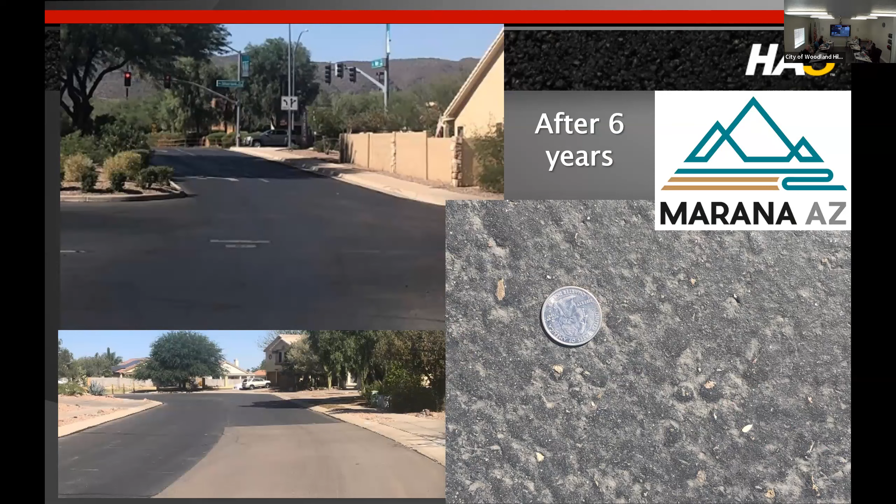They finished paving on Friday, and we were there Monday putting HA5 on. After 6 years, you had a few pop off the tops of rocks. In the bottom left picture, they had a problem with a storm drain or sewer and had to cut that patch out. The black stuff is HA5 that's 6 years old, while that pavement is only 2 years old. You can see how fast the pavement grays out, while the HA5 sticks around and keeps the dark, pretty color everybody likes.

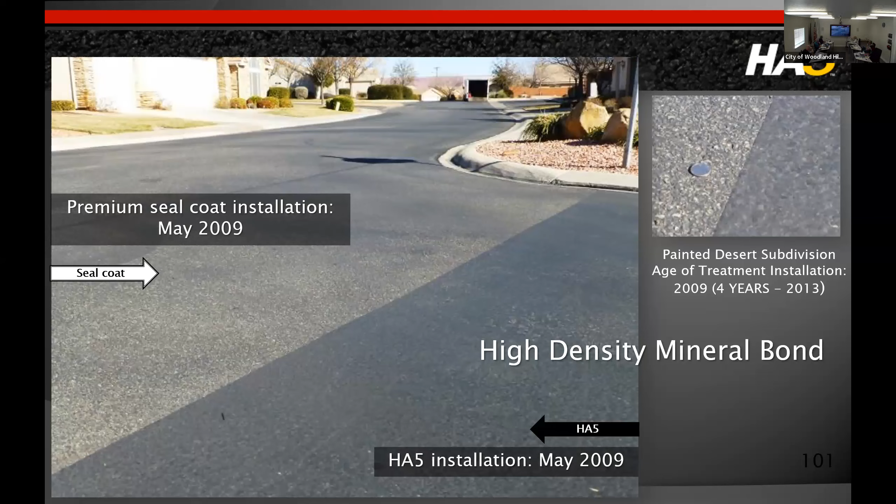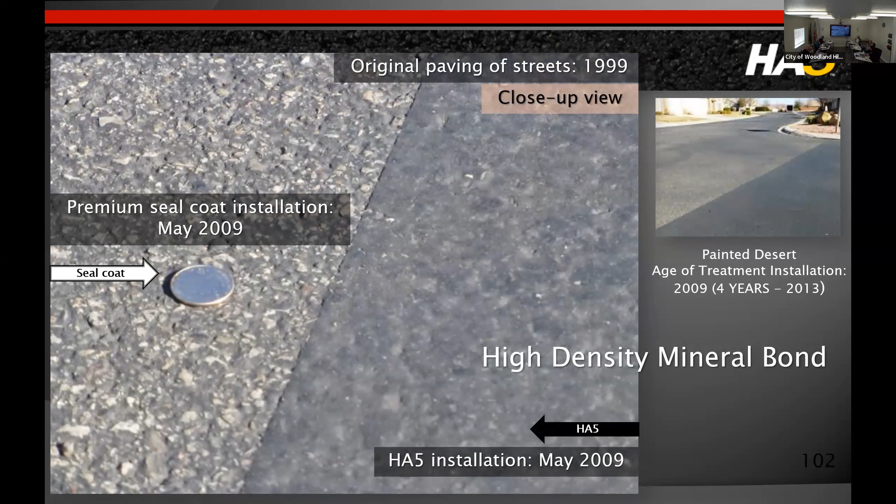St. George - this was the job I used to talk about at road school. A company came in and sold these guys, saying their stuff was just the same as HA5. This was after 4 years: HA5 is still there, still good for 5 more years before it needs replacing. That other stuff is gone - you pour water on it and it penetrates right down into the older material. They sold this community on it being equivalent to HA5, but it wasn't, and they paid a premium for it too. We've since gone back and redone that. In that community, HA5 after 4 years had reduced cracking compared to the other treatment by 9 times. It really kept the pavement healthy.

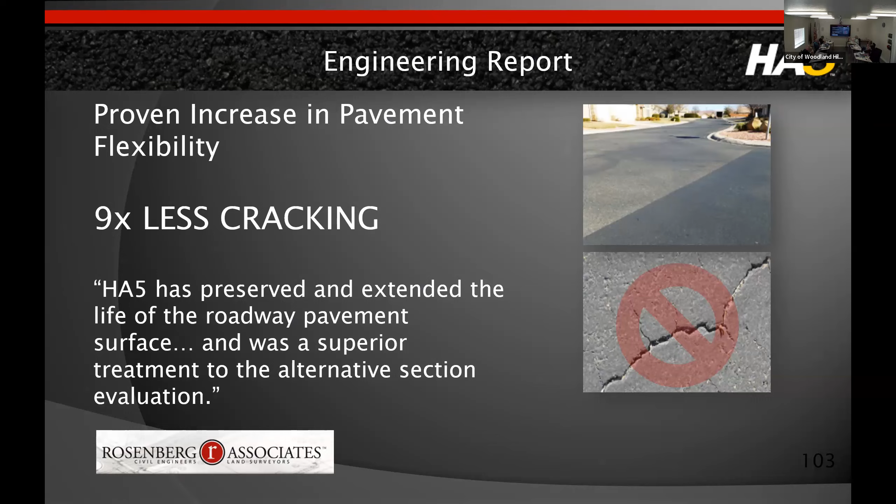All right, I'm past my time.

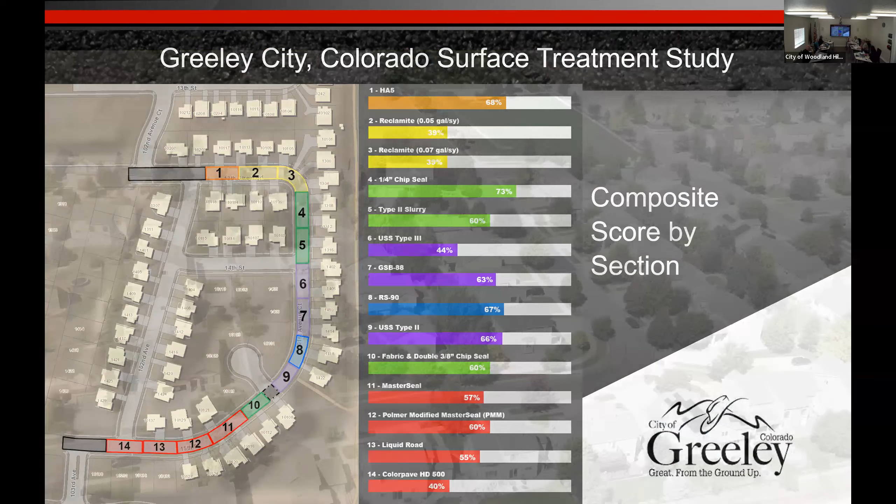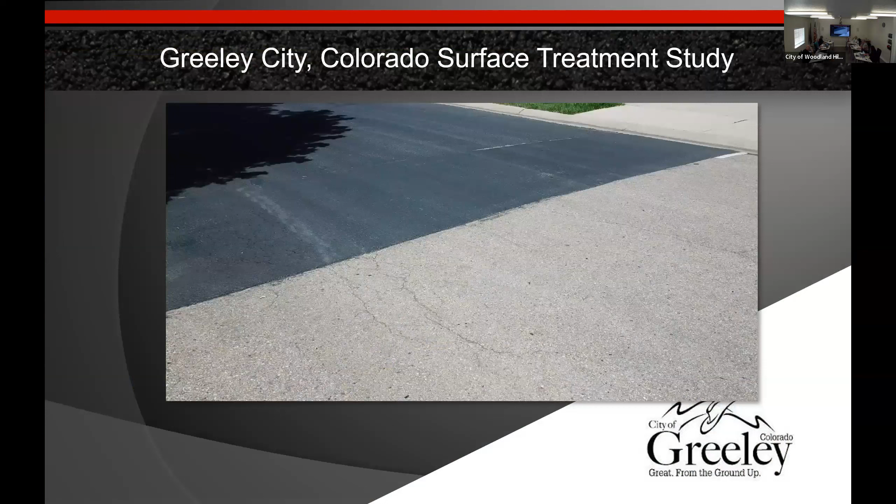Some research out of Colorado tested everything - Chip Seal scored the highest. You guys should do this. That subdivision did 14 different treatments. The residents were promised that after 3 years they'd go in and tear it all out and repave it. HA5 finished second to Chip Seal in that test, but if they'd gone further and longer, it would have come out a little different. Chip Seal's still one of the best, but I think HA5 would have been better.

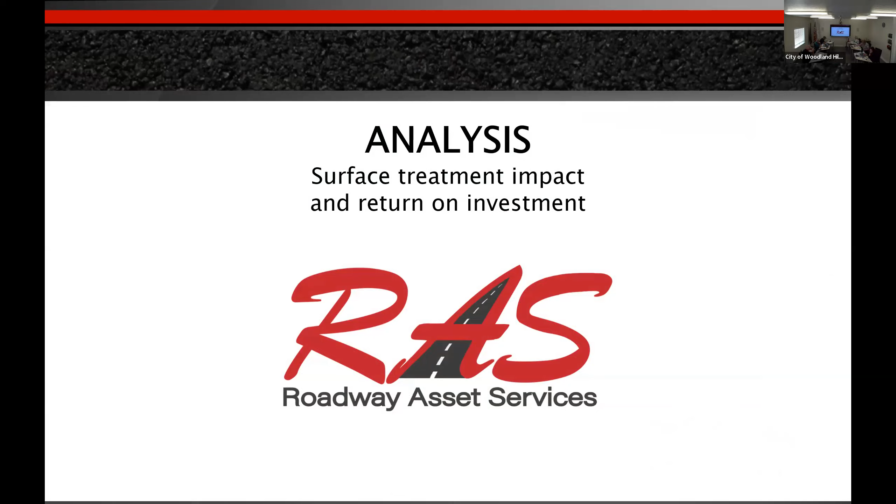This was the last thing I wanted to talk about - RAS, Roadway Asset Services. They're a data collection company, and right now they're doing Salt Lake City's roads. What they do is run a van with lasers, bells and whistles down the road, collecting data on how rough the surface is, how many cracks there are, what size they are, looking at your signage, curb and gutter, and then they determine what to do.

Scot Gordon, who does the data collection - he's not a preservation guy, but he's always asked about it - took all the information he has and punched it in, figuring out what it would cost to go 45 years with each treatment. The red line represents the do-nothing approach.

The blue line is the mill and overlay approach - at year 16 he did a mill and overlay, then at year 27 another mill and overlay, and at year 42 a full depth reclamation to get him to 45 years, each with an associated cost. The yellow line is HA5 - at year 2 he did HA5, then year 10, 17, and 21. Around year 38 or 39 he did a mill and overlay, and then at year 42 he did HA5 again to reach 45 years.

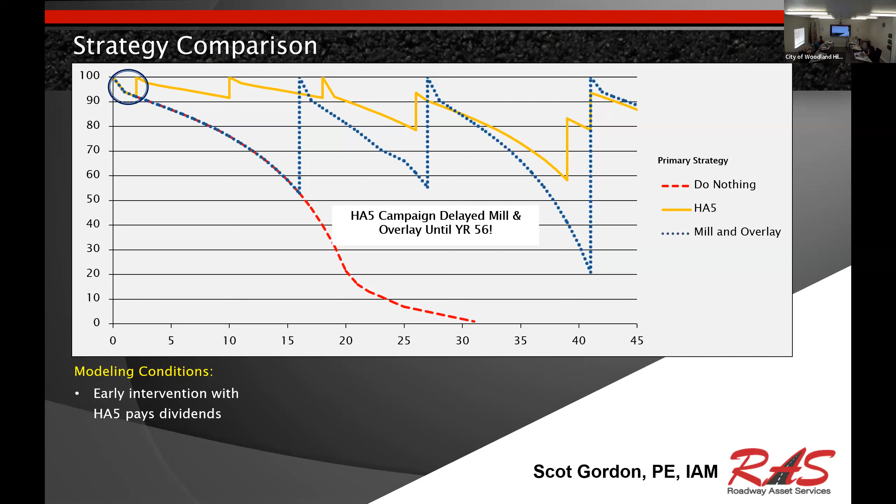So what it came up with was all the different treatment types. He gave a cost over the do-nothing approach, and a benefit over the do-nothing approach. So if you look, you have an average PCI, which is your pavement condition, you have your public acceptance rating on a scale of 1 through 10, and then your cost per centerline mile for that road.

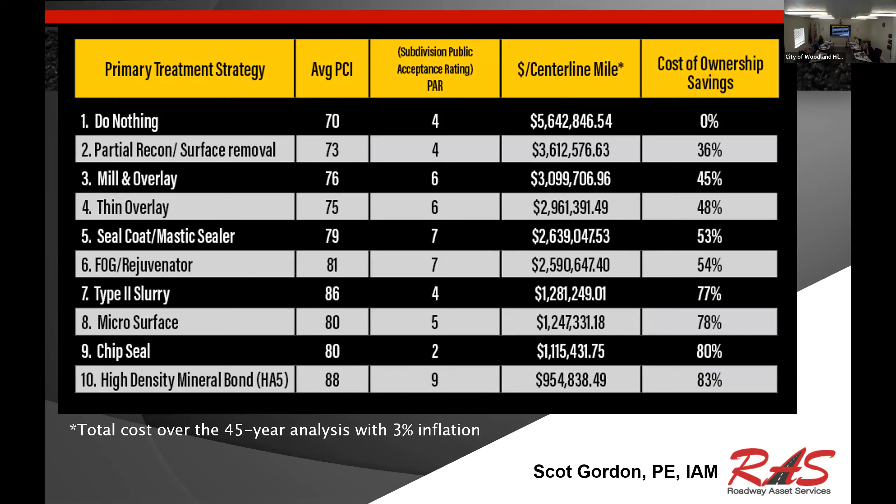The do-nothing approach is basically 5.6 million. Partial recon brings you down to 3.6 million. Mill and overlay is 3.09, seal coats 2.6, type II slurry - that's your cost for 45 years per lane mile. High density mineral bond cost for 45 years is 954,000, so you have an 83% cost savings over the do-nothing approach for HA5. The other treatments have a benefit as well, but we just like to point out that HA5 comes out on top when it's valuable for you guys.

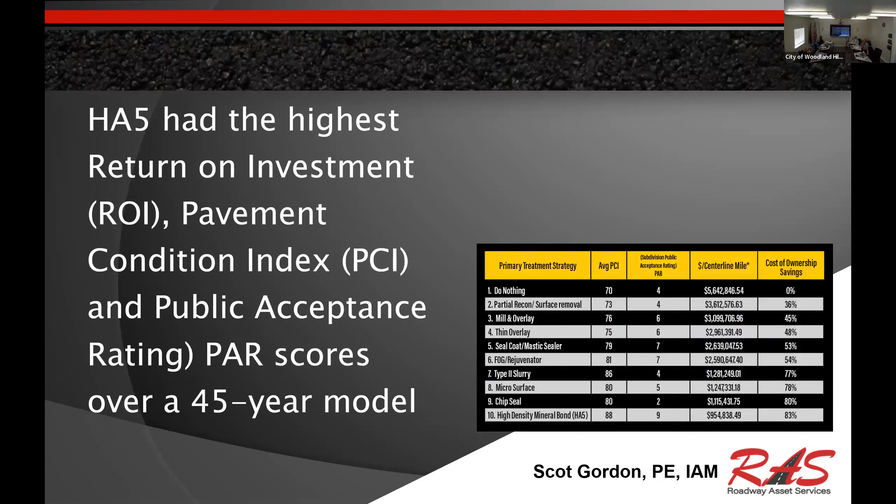So that's Scot Gordon. He's out of Texas, and he's really highly thought of. Like I said, he's doing Salt Lake City's data collection. So I'll get out of your hair. I appreciate the opportunity, I'm glad you guys got to listen.

Yeah, that was really helpful. So just a quick question, Aaron, with respect to this HA5 - I mean I know it's probably dependent on the assessment of the road, but like with respect to age, considering some of the things Corbett's talked about, is there a point at which it's probably not going to be very effective?

Oh, age-wise, absolutely. I've turned down more roads than I've actually done it on. Because when I come into city meetings, like I met with the guys from Oklahoma City and Broken Arrow, they come in, we went and did a tour of some roads I've been doing in South Jordan for a lot of years, and inevitably they all want to point at a road where the PCI is down around 50 or 60.

And it's a rehabilitation at best, if not a reconstruction. And I have to tell them, no, that's not the road - let's go look at these roads over here where your PCI is 70 or above. This is where your value is. It always takes a couple conversations to help people understand that's where I want to direct you. I'll give you what you should do on this road, if that's the road you want to preserve that year - I'll recommend whatever product is appropriate for it. But HA5 is meant to take care of the good roads.

And that's where Jamie Chappell comes in. He was spending all his money on the back end, changed his philosophy, went to the front end, started taking care of all his good roads, did that over 5 or 6 years. Now he's freed up his money because those are taken care of - HA5 has had such a good life cycle. It's guaranteed for 5 years, you probably get 6 or 7 in this climate up here with the plows. Jamie went 8 years - well, he did work for 5 years, skipped 2 years, so he went 7 years, and then in year 8 we started doing HA5 again on the very first year that we did it.

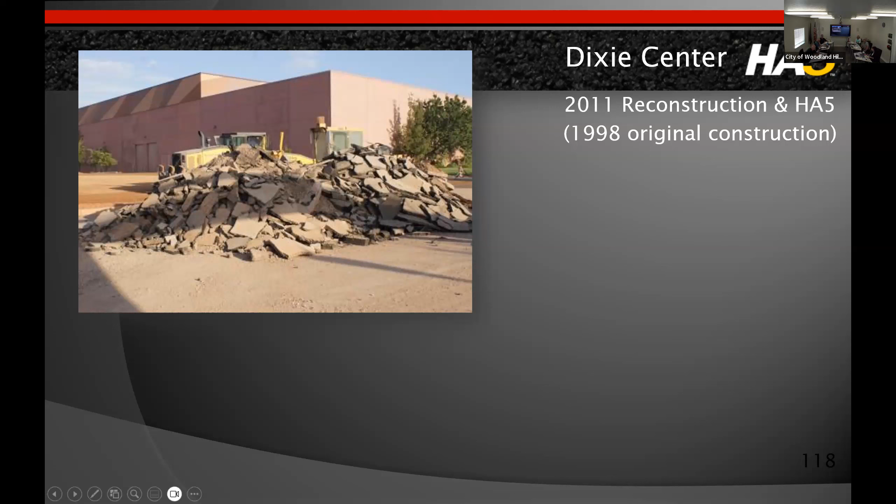So I thought we dispelled that. Chris is going to be able to answer that better than I am. You're talking as far as whether we get a one-to-one sort of... the state didn't take it, the taxes they don't?

Well, what I believe, and again Chris is on a bullet train in Tokyo so maybe he's not here, but our director of finance, my understanding in conversations I'd had with him is that whether we do it as a tax increase or as a fee, we'll still get the full benefit of it, because I thought that very thing. But that's the way it was explained to me.

It was explained to me too by the engineer for Highland, Todd. He's not there anymore, but he explained it to me that way because he did town halls and let the people decide, because they did the same thing Pleasant Grove did, but he did town halls. Pleasant Grove just went ahead and did it.

And then they had that special interest group that got mad at him. Now Highland did the exact same thing, but they did 4 town halls and let the residents vote on how they wanted to do it. They said, look, we can continue to do what we do, but we don't have enough funds. So eventually we're going to have to either deal with lower quality roads, or let some roads go back to gravel.

Or we can do a tax, and this would go on your property tax or whatever. And Todd explained to me that then the state would take part of it. That's where I heard it from. Maybe he misspoke, I don't know.

That was my understanding, but we actually did a town hall on a different topic relating to that very thing, and the night of, I became aware that actually wasn't the case, so I don't know. I can't speak authoritatively on it, but Todd gave their residents 3 options: status quo, what we've been doing, do as best we can with what we got, do the tax, or do a fee.